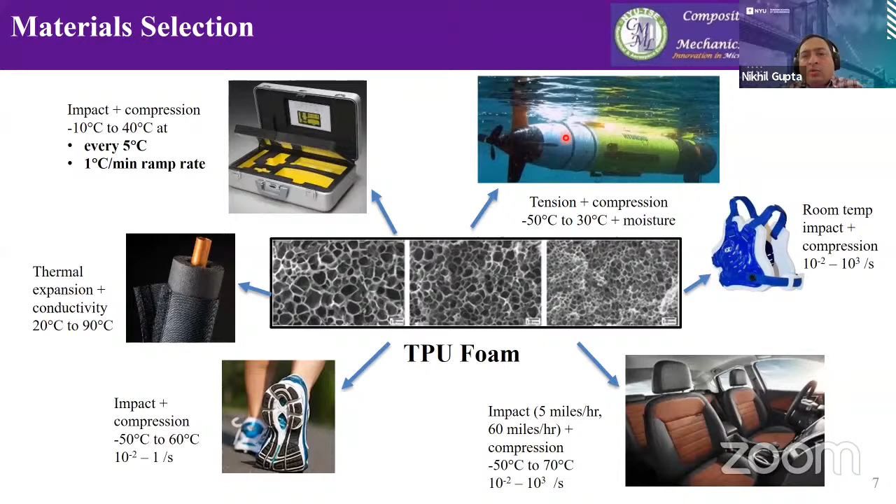So we wanted to look into this in some more detail. Now, the complication with viscoelastic materials, and the definition for a viscoelastic material, is that when you stretch or deform this material, the initial part of the deformation is completely linear elastic, which means when we release the stress, the strain is recovered. But then there is also a time dependent phenomenon.

You can do this exercise with a rubber band at your home. Stretch it for some time, keep it stretched, and then release it. Some part of the deformation will be recovered instantly, and then there will be another component which will be recovered over a period of time. This time dependent component is called viscoelasticity. This can be linear viscoelasticity or nonlinear viscoelasticity.

We won't go into those kinds of details just yet, but we want to look into these characterization complexities for these materials, because they make it more and more difficult for us to characterize the material properties over all the parameters which are required for these kinds of materials.

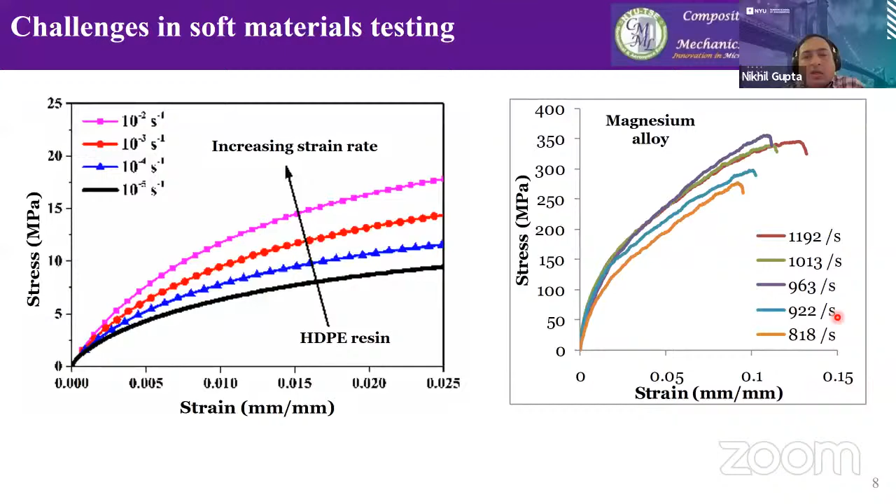Imagine how many tensile tests need to be conducted in order to calculate modulus to plot a graph like this. Now we have 10 to the power minus 5 to 100, that means 7 orders of magnitude in strain rates. And the temperature is varying over about 85 degrees in this case here. So if you are conducting these tests every 5 degrees C, as one of the applications had mentioned, we are looking at maybe 15 different temperatures and 7 different strain rates, so it's about 105 different conditions at which we would be generating data.

And you know that every tensile test needs to be replicated 5 times. So that means we are looking at about 525 specimens to test before we can plot a graph like this. And that's a lot of tensile testing.

For companies, it's not just that the number of tests is the problem, but the amount of material needed to conduct that test is a lot of material. So if you are a company developing material, and initially you are testing novel materials which are quite expensive to produce, and then you have to conduct 500 or 600 different tensile tests, it's a lot of material to produce, conduct the test, and that expense itself becomes overwhelming in the material development exercise.

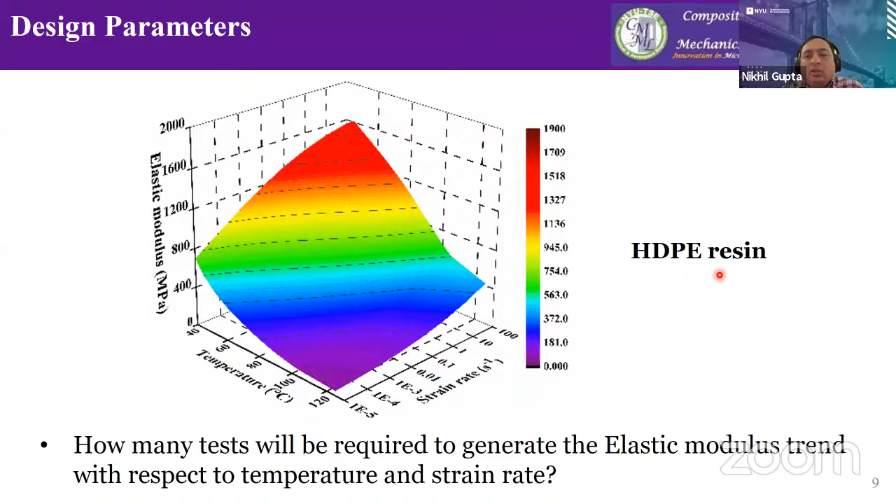Now, the other problem here is this: not a single equipment can test all the materials from 10 to the power minus 5 to 10 to the power 4 or 5 that we are looking for. We have a range of equipment that we use for different purposes. The universal testing machine, like the Instron machine, can test usually from 10 to the power minus 5 to 1 per second. The hydraulic machines can go up to about 100 per second strain rates if you're lucky, though usually they go up to about 10 per second.

Then there's the split Hopkinson pressure bar. This equipment became commercially available only recently; previously it was built by people who wanted to use them. Our equipment is home built, and this machine can go up to about 500 to about 5,000 per second strain rates. Then there are many other methods like Taylor impact, which can go up to about 10 to the power 7. Explosives go from 10 to the power 7 to 10 to the power 9 per second strain rates.

So there is no single test method that covers the entire range of strain rates to provide us with the data, which also means you need to invest in multiple equipment if you want data over a wide range of strain rates. Apart from that, there are other methods like DMA, dynamic mechanical analyzer, which is based on vibration response. There are also free and forced vibration testing methods, and ultrasonic imaging methods, all of which can provide some measure of modulus, if not the direct modulus.

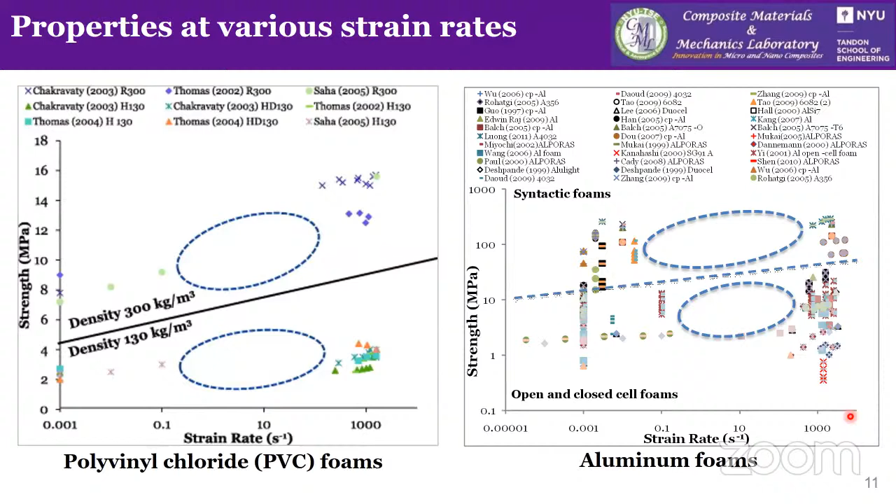So if the tests were that simple, and if you have so many different machines available, why is this discrepancy that there is this range where there's no data available? Because if the machine could go, people would have reported data. These are very common materials out there.

So that became a question in our mind, and it turns out this is a fair observation: hydraulic machines don't go to about 100 or 500 per second, whereas the Hopkinson bar is not able to come down to about 100 per second. There is this range which is not covered by any of these equipment. These are multiple questions that I have posed so far, and we need an answer based on the basic physics that governs the materials and their properties.

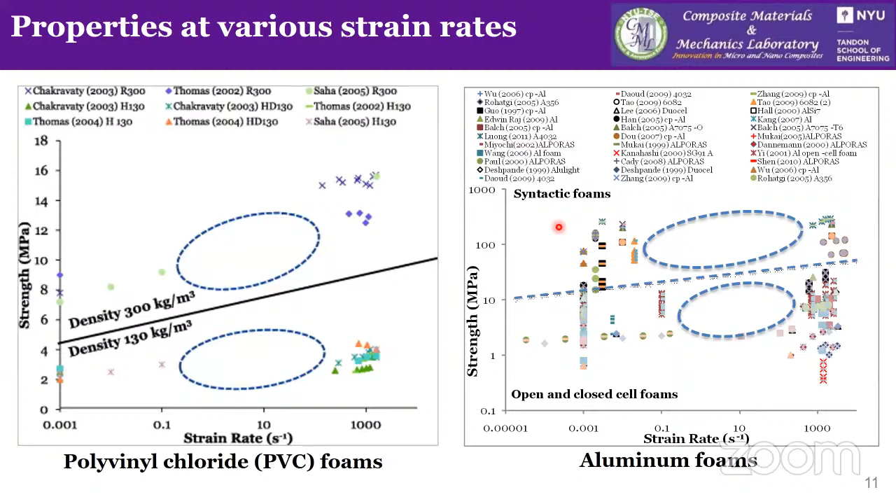So here what we did was we looked into these equipment one by one. Conducting these tensile tests is a very difficult and challenging problem. You need a lot of material, and if you have to mount a furnace to conduct this testing, it just takes too long to conduct all the tensile testing. So we selected this equipment called Dynamic Mechanical Analyzer, or DMA.

The way this equipment works is that you can have different configurations for material gripping. In this case, there are two clamps, and a beam-like specimen is clamped between them. At the middle part, we can apply a load to bend it. This is called a dual cantilever configuration. This applied load can be at different frequencies.

For viscoelastic materials, if you keep loading this material up and down at a certain frequency, a lag will be developed between the stress and strain cycle. Once this stabilizes, you can measure the phase difference between them. The energy stored in the material in one cycle gives you the measure for storage modulus, and the energy dissipated in one cycle gives the measure of loss modulus. The ratio of loss to storage modulus is called tan delta, or the loss tangent, which is a parameter used for the damping capability of materials.

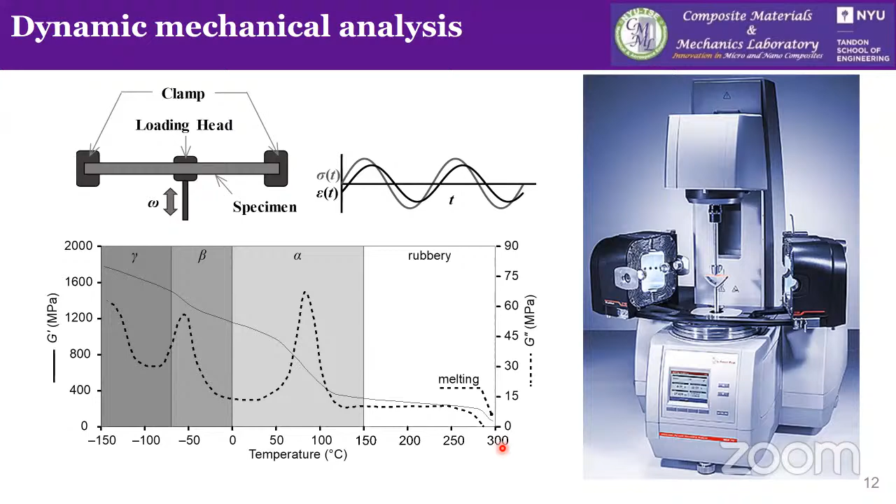So how do we deal with these viscoelastic materials? Here is this basic equation. E prime here is called storage modulus, and E double prime here is called loss modulus. They are related to each other by this complex function, and E star is called the complex modulus. Now this complex modulus is not elastic modulus, it's not Young's modulus. This complex modulus is E prime plus iota E double prime.

So storage modulus plus this complex function, and then loss modulus. E star is a frequency dependent quantity, whereas Young's modulus is a time dependent quantity, strain rate dependent quantity. So that's how they are different.

Now, if you have a response like this, and if you have had some training in viscoelasticity, what we have been doing for a long time is we measure equations like this, calculate the E star, or take the E prime. Suppose this is my graph for E prime with respect to frequency and temperature. What we can do is take the graph at room temperature. Suppose this is the line at room temperature, I'm just picking arbitrarily for now. What you can do is plot this to zero frequency theoretically, extrapolate this line to zero frequency, and calculate the value for modulus at that point, and then just call it elastic modulus or Young's modulus at zero frequency. So this is what we have been doing for quite some time in this case.

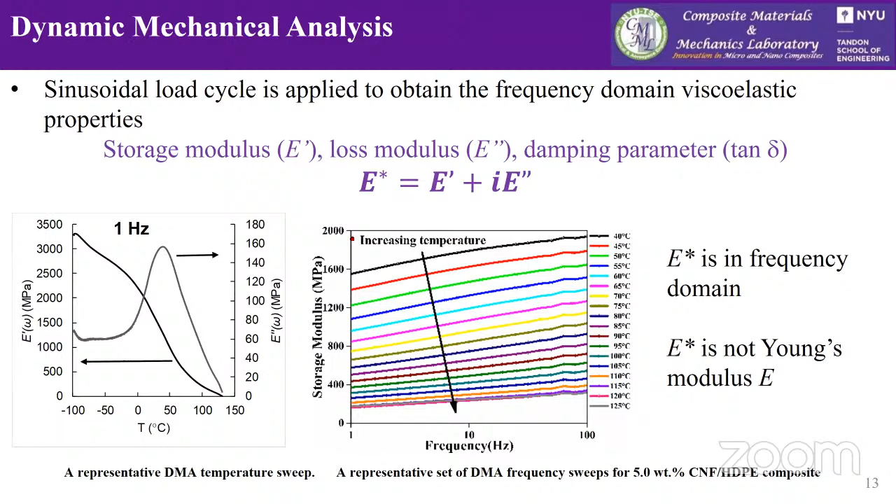So if we extrapolate it to frequency zero, it is supposed to give us a measure for Young's modulus. But we are doing a lot of things here which are not in our favor. First, most people would do this testing at 1 hertz nominal frequency, and that's what most of the data in this field is in the reported literature. What you can also do is run this frequency sweep, and you can get this complete frequency versus temperature data. If we extrapolate it to zero frequency, effectively what we are doing is neglecting the frequency component completely and making this graph actually useless after all the testing that we have done.

Now you can also look at this graph on the right hand side here. What this graph shows us is that even at very low strain rates, there is remarkable strain rate sensitivity in this material. And all these strain rates are allowable by the ASTM standards.

So extrapolating it to zero frequency is really not the best idea, because you don't know which strain rate you are going to end up with in your actual tensile test. Extrapolation to zero frequency means zero strain rate, which means 10 to the power minus 9 or 10 per second strain rate. But here you can see that actually there is remarkable strain rate sensitivity in this case, and the data that you will get by extrapolation will not be equivalent to what you are measuring from your tensile test. So the tensile test is at a certain strain rate, and that's what we have to capture in our tests, even when we extrapolate from the DMA data.

So the question comes, first of all, what exactly is this E prime? How is it related to the elastic modulus? And how do we find out the way to recover the elastic modulus with respect to temperature and strain rate from the data that we have for the storage modulus? So these are some of the questions that we are trying to answer here, and see what comes out of this exercise.

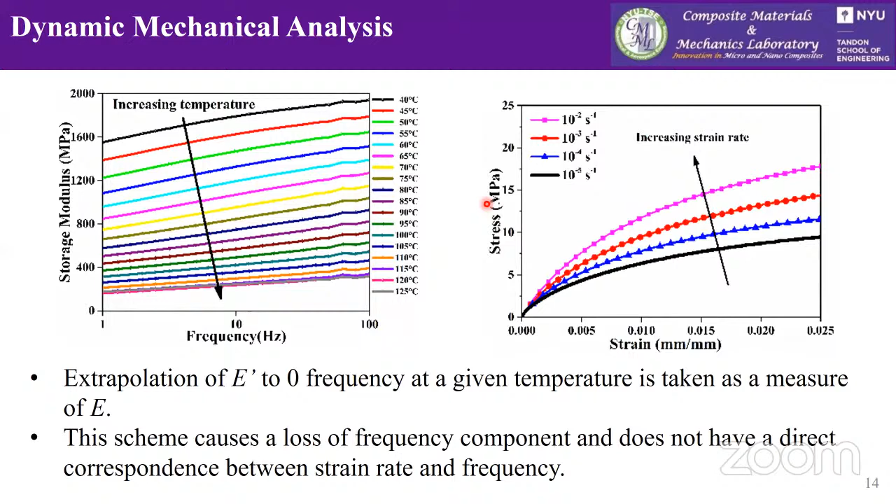So what we did was we looked at the definitions again, and it turns out that we can conduct this time temperature superposition to develop a master curve. Now, if you have conducted any testing, and this is from general experience also, when you heat up the material, it becomes softer, which means its elastic modulus reduces. And when you increase the strain rate, the elastic modulus increases. So decrease in temperature is technically similar to increase in strain rate as far as the modulus trend is concerned.

So now when we conduct the time temperature superposition, these are the kind of trends that we are going to capture in our work. What really happens is that we pick any of these temperatures as the pivot temperature. Let's say you picked 85 degrees C as your pivot temperature. So all the graphs above 85 will shift to the right, and all the graphs below 85 will shift to the left. And you keep shifting until you can find one single continuous graph, and this graph is called the master curve.

So I see a chat message here that various forms of textile materials like glass fiber and geogrids also fall in viscoelastic, as they are, ASTM creep test applicable. Yes, this is correct, that a lot of these materials, and I'm going to show you results for composite materials at the end once we finish the model.

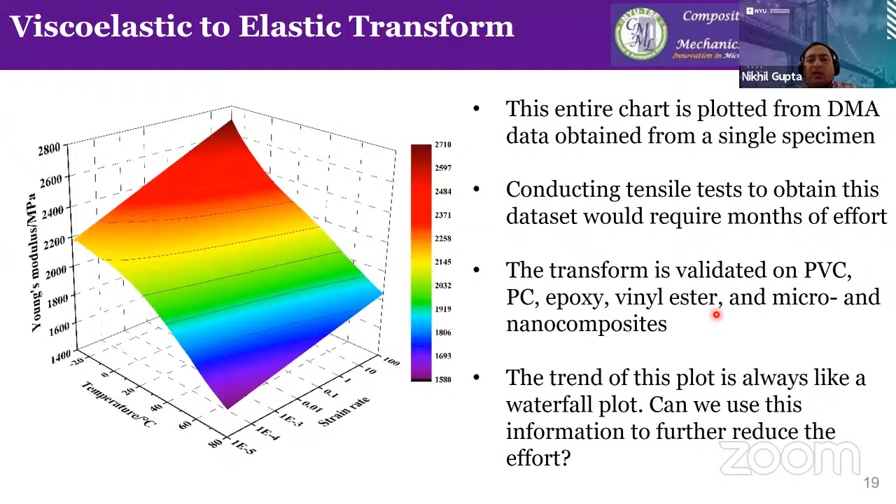So we can also do the same kind of testing from storage modulus. If you've got the storage modulus, what we would do is apply this Kramers-Kronig relationship to convert it into loss modulus, because as you saw, the equation was very simple: for complex modulus it was E prime plus i E double prime. So E prime and E double prime are related to each other.

When we are playing with the storage modulus and loss modulus, what we can do is apply another method where we first estimate a frequency dependent and frequency independent component of modulus. The frequency independent component can just stay like that, and the frequency dependent component can be converted into the time dependent information, and then we can add it up back to recover the elastic modulus.

So the equations are simple here. You can see instead of sine, we got the cosine this time. If you are starting with the loss modulus, you can go back to the same scheme of equations and find the elastic modulus. So this Kramers-Kronig relationship is important because it defines the direct relation between storage and loss modulus quantities.

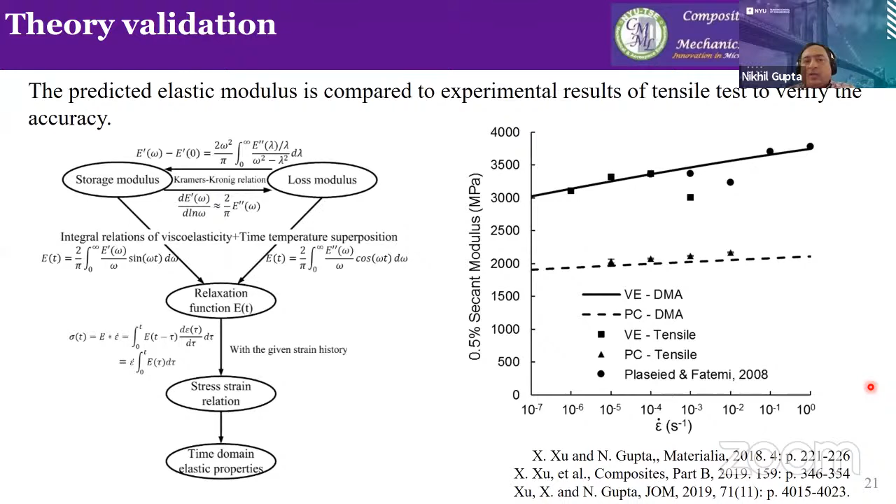So the effort is reduced quite a bit, and that's important for viscoelastic materials. Now the next question comes: this graph that we are obtaining is still taking us about 8 hours to generate on a DMA.

So the way the DMA does operate is we run this load cycle until it reaches an equilibrium. After that, we ramp up temperature. There is a ramp rate, and then the next temperature is defined about 5 degrees higher, and then we do the testing again.

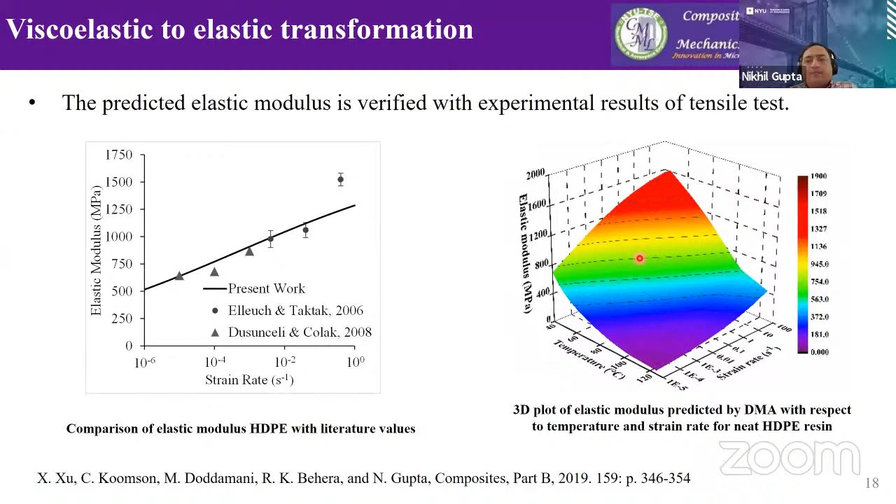So let me just go back to the previous chart one more time for quick reference here. So we'll just stay here. So here you can see 40 degree, 45 degree, 50 degree, 55 degree, and the testing is going on from 40 degrees all the way to about 120 degrees. So these lines are at numerous different temperatures.

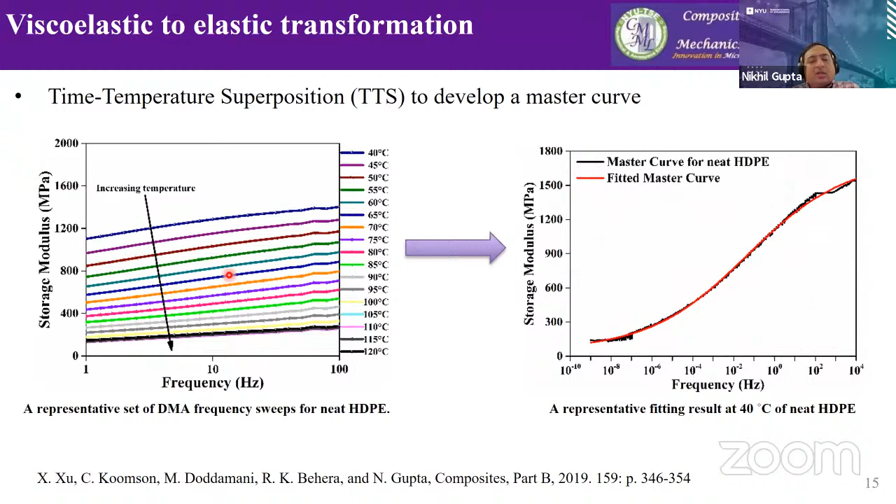At every temperature, we are taking a number of frequencies - we take 1 to 100 hertz, but usually we divide it into 20 parts on a log axis. So 20 different frequencies, and at 5 degree intervals, these are numerous temperatures. So when you look at a graph like this, we have 560 points here to get this entire data set. Now the question that came up is: do these 560 data points need to be taken, or can we further reduce this testing regime and still get the same accuracy of data?

So from months of tensile testing, we are down to 8 hours, but we're not satisfied yet. What we realized here is that the storage modulus graph, or the Young's modulus graph, always comes with the same kind of profile. It's starting on the left here, and then it's continuously reducing. The slope is changing, but the trend is just reducing as you increase the temperature.

We can use this kind of information and try to model this entire surface in one step, rather than taking those 560 points upfront. So here what we did was we started with a particle swarm algorithm, and these methods are well developed in the literature for how to estimate the surfaces. I'm sure you might have studied the topic in one of the math courses.

So the way particle swarm algorithm works is that you take a set of points and randomly fit those points on this surface and then see if you can capture the qualities of the surface properly or not. If you don't, then you increase the number of points and keep doing it until you can capture this surface properly. At every step, you can run some tests. So you can start with maybe 3 points, and then keep adding points until you are able to capture this surface with a good quality of fit.

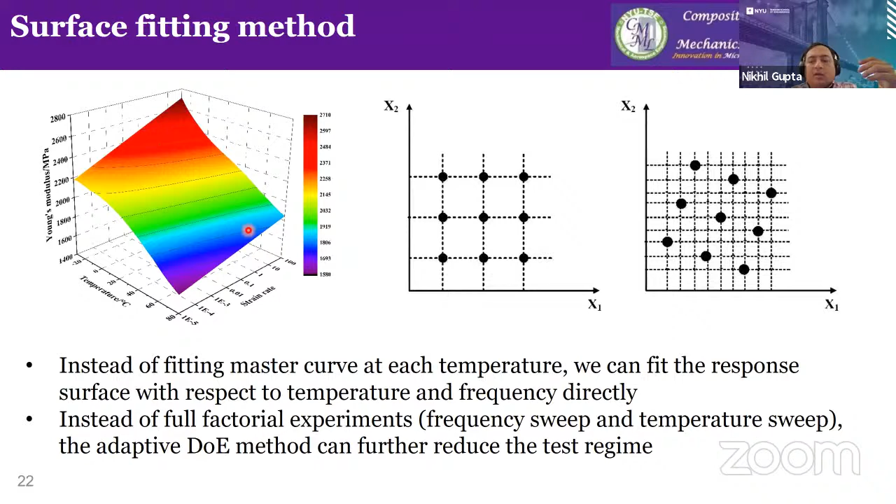So in this case, the particle swarm algorithm, which is the simplest one, what you can see here is that about 100 points give you pretty good convergence. The error is below 0.1% in that case. If you are happy with an error of say 0.5%, then we are looking at only about 15 or 20 points where you can get good convergence.

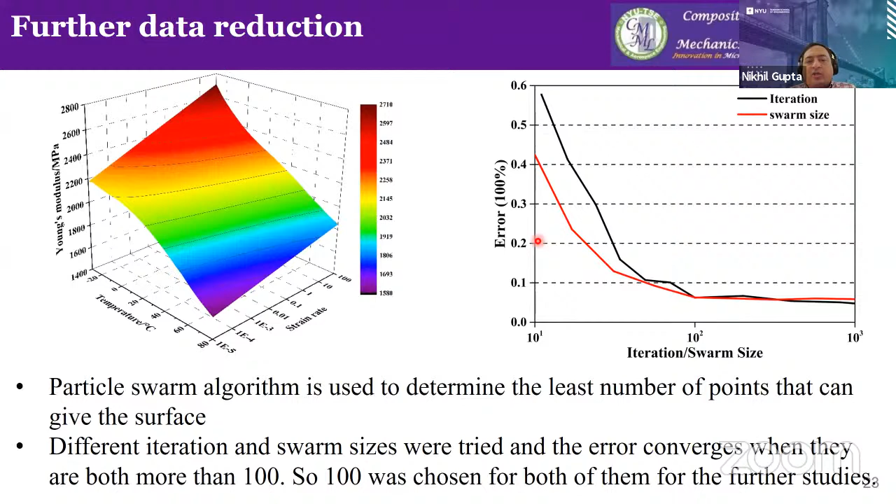So instead of doing this standard scheme of 560 points for measurement, what we can do is superimpose this particle swarm algorithm. Based on the accuracy that we want in this data, we can do this optimization and find the value based on like 20 points to about 100 points. So that reduces the testing time further.

And many of these sampling methods are now available. There's Monte Carlo, Latin Hypercube, Halton quasi Monte Carlo, or Sobol quasi Monte Carlo method. So these are more advanced methods than particle swarm algorithm.

And what it does is that only 10 combinations of temperatures and frequencies, if you have to measure, in that case the testing would take less than half an hour of machine time. And then you have the entire chart with about the same accuracy as you used to have from tensile test.

So what we were able to achieve in this case is the months of testing was first reduced to 8 hours, and then we further reduced it to about half an hour, and that was quite useful.

If you can do this with loss modulus, I demonstrated that you can also do this with storage modulus because they are related to each other by the Kramers-Kronig relationship. Loss modulus is related to loss compliance, and loss compliance is related to storage compliance. So no matter which data you have, you can always run the same calculation, and then you can achieve the modulus of the material.

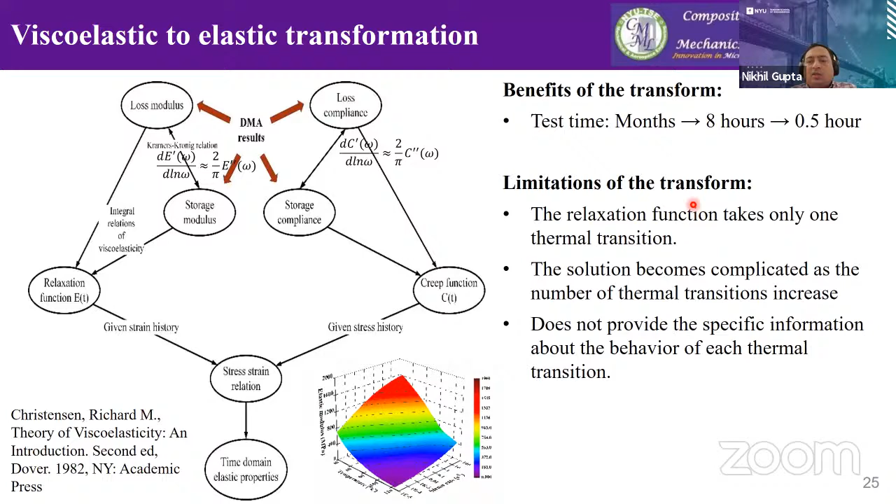DMA is not just related to the standard DMA equipment, but it's the cyclic testing scheme. So technically, any cyclic testing like fatigue testing is also quite similar to what we have been doing. We haven't expanded the work to fatigue yet, but I don't see a reason why it would not satisfy those conditions.

And here the data actually is coming from nano indentation. This nano indentation is used a lot these days for nanocomposites, nanomaterials, or biomaterials. So I just picked the example for biomaterials, working with one of the groups in medical school here.

So they did this kind of testing on the larynx, which is the vocal fold tissue here, and they tried to create storage modulus maps from the nano indentation testing. We took their data and did nothing else on their hardware scheme—it's the existing data that they had, but we applied our method. Eventually we came up with the storage modulus to elastic modulus conversion here.

So the way this nano DMA works is that there are two methods. One is the Oliver Pharr method for nano indentation. In this, we increase the load, and then we hold the load at some point. Finally, the load is released, and from this relaxation, we measure the slope of the relaxation part to calculate the modulus. From the Oliver Pharr method, the more evolved method is the CSM method.

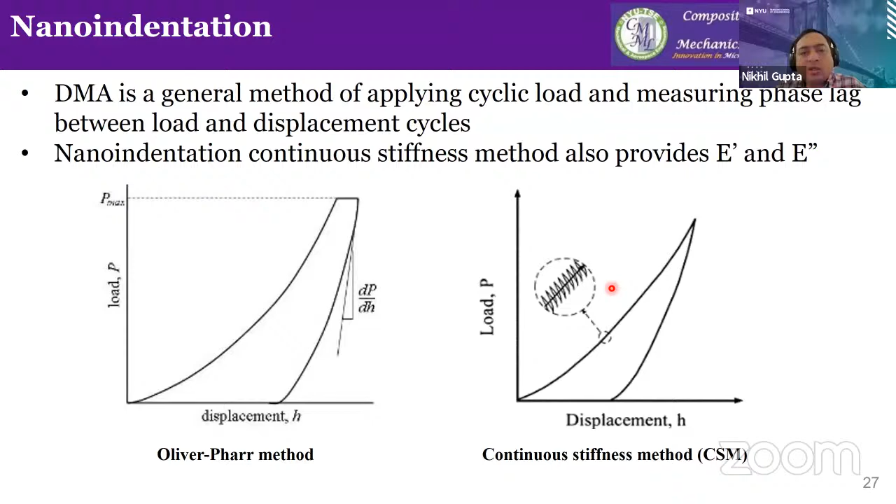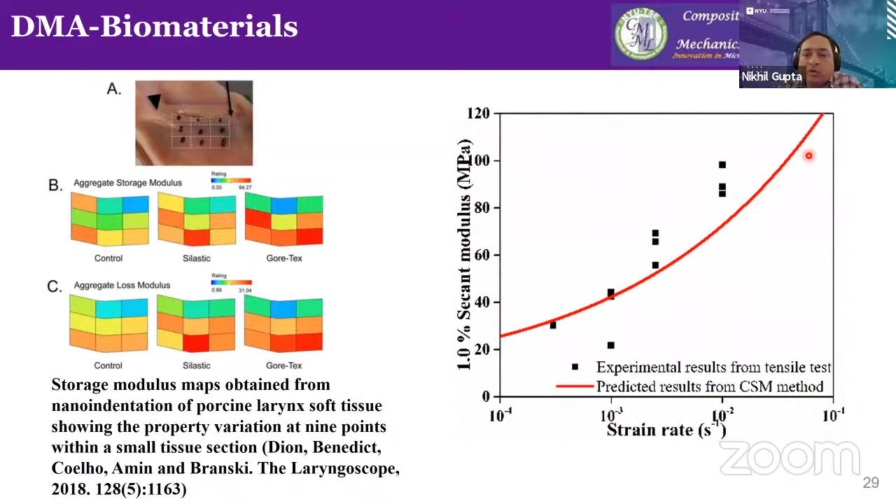So once you are able to convert the storage modulus to elastic modulus, here you can see that the fitting on the data with our model is quite close compared to what has been measured from tensile test here. So the method can be useful for a wide range of strain rates.

Now, the question here is also that can we apply this artificial neural network to estimate the properties of materials? And why do we want to do it? There are several reasons for doing it. Now, first of all, the artificial neural network architecture is very similar to time temperature superposition principle. It's not the same, but the architecture is similar, and we can take advantage of that.

The second point here is there's a lot of data generated in DMA. Not a lot of mechanical test methods generate that amount of data. So DMA provides us with a possibility of actually applying this artificial neural network, train the neural network properly, and then use it for certain predictions.

Many times people would ask the question that the artificial neural network methods are only used for interpolation. So what is the benefit of doing that for interpolation? So the benefit actually is not in solving the forward problem, but it is to solve the inverse problem.

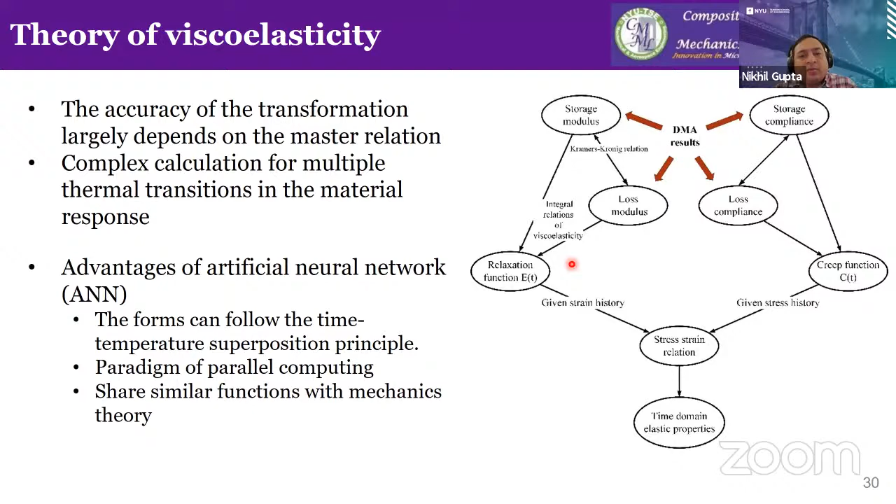Because if your customer comes and they say that I would like to have a material with certain elastic properties, what should be the material composition? A lot of times solving these inverse problems don't have a unique solution. So you would like to conduct the multi-criteria optimization, you would like to get into more specifics of it, and then the modeling scheme becomes more and more complicated as you apply more and more parameters there for multi-criteria optimization. And for problems like this, the neural network or machine learning methods become much more friendly here.

So the architecture here that we are going to use is going to be very standard. We are not inventing new machine learning methods right now. We are not inventing new artificial neural networks, but these are standard methods, and we are going to see how well they apply to our kinds of problems.

So if you're starting with storage modulus, it's a little bit straightforward. If you're starting with loss modulus, then you would have to have an extra hidden layer for Kramers-Kronig relationship. And the benefit here is that if you have both storage and loss modulus data, you can use the KK relationship at some point in this architecture to cross-validate the data and make sure that it matches up, that there is no discrepancy there.

So in our case, we divide the data set into training, validation, and testing set with 65%, 15%, and 20%. And once this is trained and validated, you can just use the same architecture on different compositions, and then try to find the values for different material compositions and estimate the elastic modulus for there.

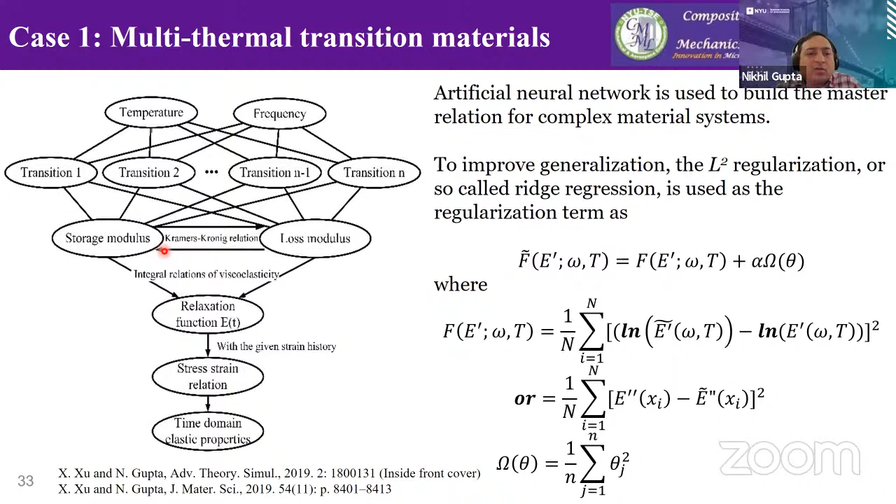So I won't go into the architecture of these neural networks, but here we use the L2 regularization, or the ridge regression method, and train this neural network. We use both storage and loss modulus components, and in between, in this layer, we try to use the KK relationship to cross-validate the values which are coming out from there.

So Pearson's correlation coefficient, this predicted storage modulus versus experimental storage modulus from the trained data set, the R value is 0.999, which is pretty good. And then we can calculate the heat map for the error. This error map shows that there are some pockets where error is a little bit higher, but more or less it's within, I think, 3% for most part of this graph. So that's pretty good for materials characterization field.

And then we tested this for graphene epoxy composites and EVA, apart from many other different polymers that I had shown before. So nano composites at the macro scale, you can take them as homogeneous materials, and the data matches extremely well for materials like that predicted from the neural networks. So this work was featured on the inside cover of the Advanced Theory and Simulations.

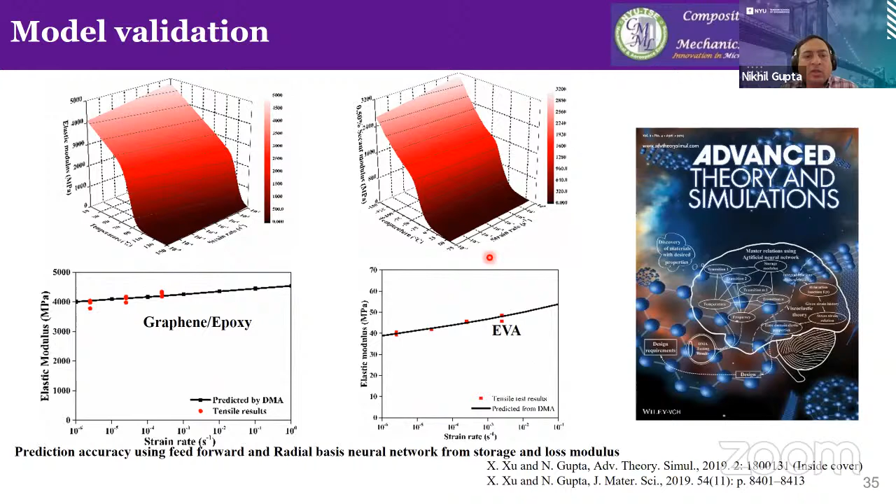We conducted the experiments on fiber reinforced composites. Architecture again remains the same, but the directionality of fibers becomes one of the considerations here. So one of the layers was related to the storage modulus at 0 degree, 45, or 90 degree, which means different directions of fibers.

With these different directions of fibers, you have to take the stiffness matrices differently. So we calculate those stiffness matrices for different directions. Using those stiffness matrices, we come to storage modulus in any direction. And finally, on that, we apply our transformation to calculate the elastic modulus.

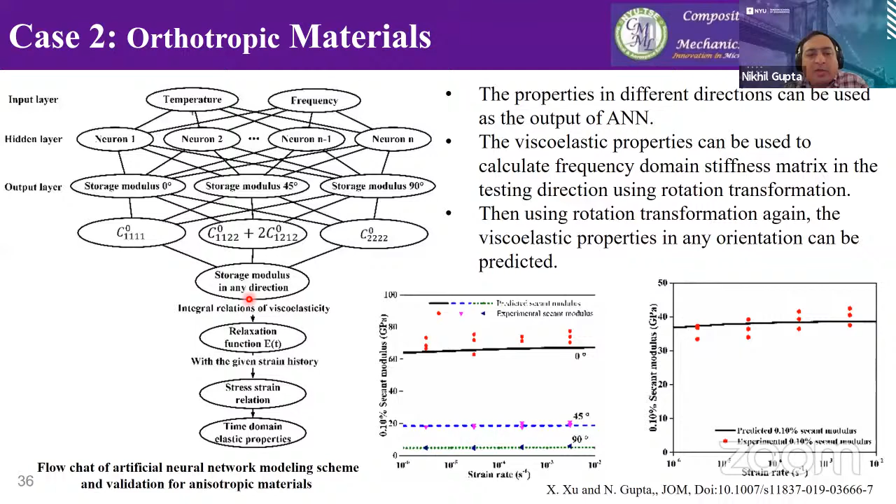The data again matches pretty well, as you can see from these validation graphs. And this was published in the JOM recently.

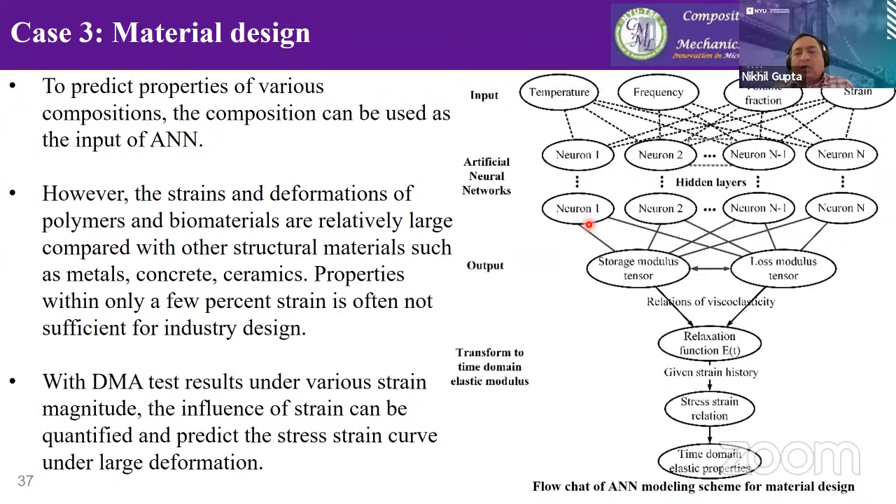Finally is the case of materials design, where we solve the inverse problem, starting with the properties we are looking for, and eventually going into the material composition. So we estimate the storage modulus needed to provide the right set of properties in the final material, and then we select the material based on that.

So a number of different materials here, different volume fractions of particles in this material. This is a particulate composite, syntactic foam. And you can see the data matches pretty well with our predictions, more or less.

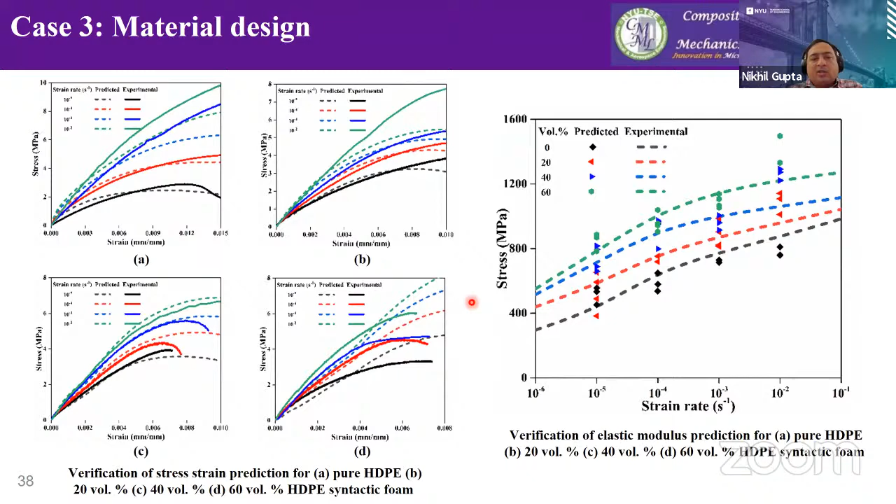The predictions start to deviate when you go to higher strains, simply because the viscoelasticity at those strains actually changes to nonlinear viscoelasticity, for which these equations are not yet designed. But that would be the next thing to do in our case. So these are the materials characterization charts that we have developed based on the scheme like that.

So in conclusion, what we were trying to do was develop this scheme where viscoelastic properties are converted to elastic properties. Storage modulus is measured very often, but it is not something we use in any modeling or simulation. We don't use this quantity in finite element analysis. What we need really is the Young's modulus. But having a frequency dependent quantity like storage modulus was not very helpful in that case.

So we developed this transform where viscoelastic properties were converted into elastic properties, or the Young's modulus, and the frequency component was converted into the strain rate. And that was very useful, because in a single step, we could get the Young's modulus with respect to temperature and strain rate.

So that reduced the required 650 tensile tests to just 1 day of DMA testing, which was about 560 points within that data set. And then we conducted data reduction, where those 560 points were further reduced to about 14 points with good accuracy in the system. So the effort was reduced to about half an hour of total testing time.

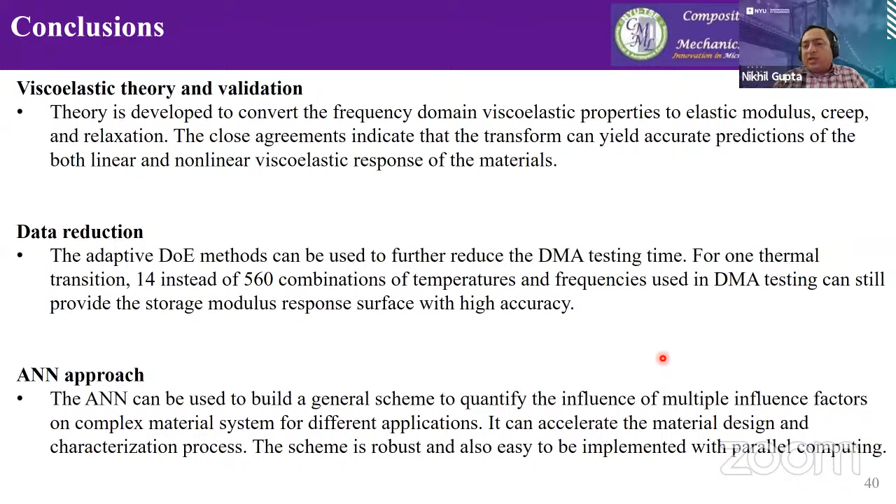Okay, there are a couple of other questions in the chat. I think somebody said - Rohit is asking a question: various Monte Carlo methods were mentioned, can you elaborate about limitations and direct implications towards interpolation of data in order to reduce the test set?